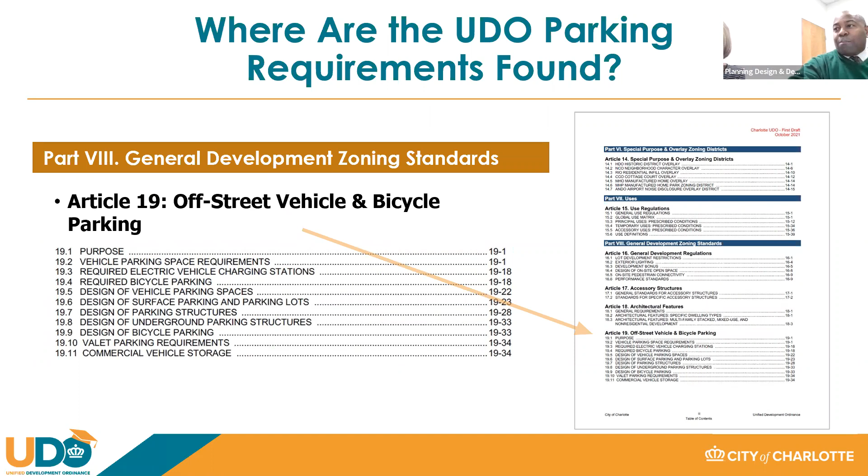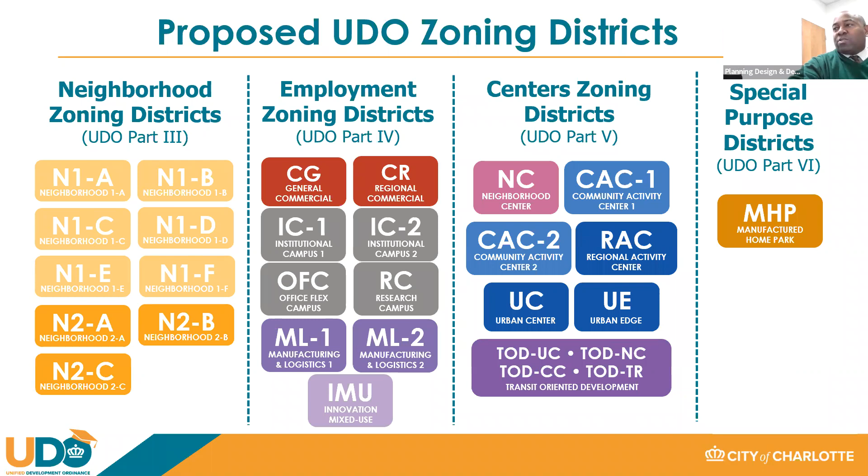When we had our proposed UDO districts, we had broken them up into, this is kind of a refresh, our neighborhood zoning districts, as you can see here. Then we had our employment zoning districts, our centers zoning districts, and then kind of our special purpose districts.

When we updated the UDO and our parking, we made changes. We went to a 3-tier approach to parking requirements. In tier 1, there are minimum off-street parking requirements and no maximum parking limits for the districts you see here: ML1, ML2, IC1, Office, MHP, N1, all the districts, and N2A.

In tier 2, we have both minimum and maximum off-street parking requirements for the IMU, IC2, RC, CG, CR, NC, CAC1, N2B, and N2C. In tier 3, there are no parking minimums except for a limited number of uses, including residential in certain locations. Maximum parking limits apply. That's in our TOD, UC, CAC2, RAC, and UE.

The tier 3 minimums for residential uses may be reduced or eliminated with a local city parking permit program or a parking studies strategy plan to reduce parking demand approved by the planning director.

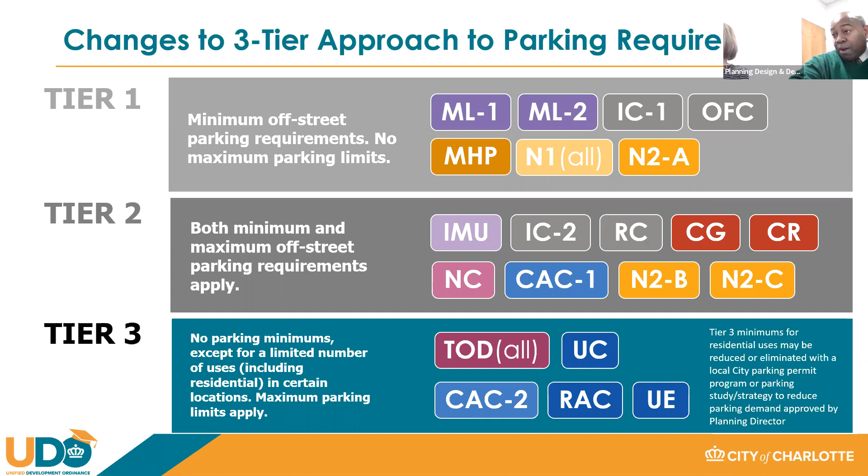The 3-tiered approach to parking requirements: again, in tier 1, there are minimum off-street parking requirements, no maximum parking. In ML1, ML2, and so on, for single family it's 2 spaces per unit. Manufactured homes, 1 space per unit. Other residential uses, 1.5 spaces per unit. For non-residential, we use the typical standard of 1 space per 500 square feet gross.

Some uses have different parking standards based on their unique characteristics. Car washes and correctional facilities are examples.

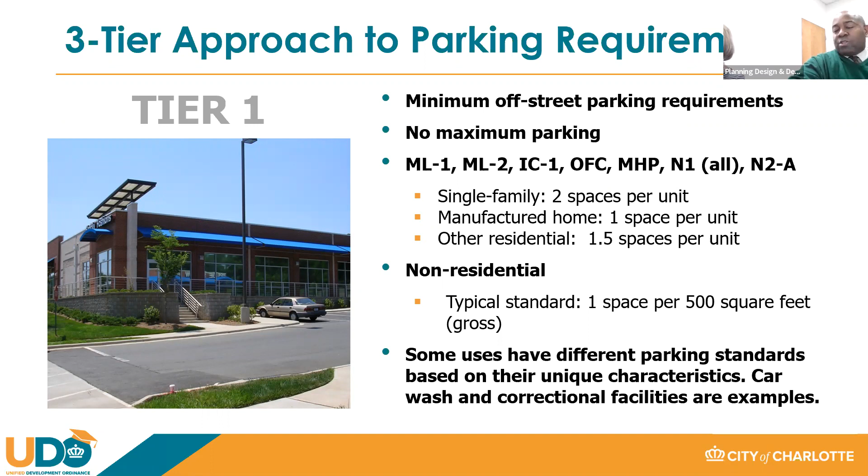In tier 2, it includes both minimum and maximum off-street parking requirements. The maximum does not apply to parking structures. You can see the districts listed here that it applies to.

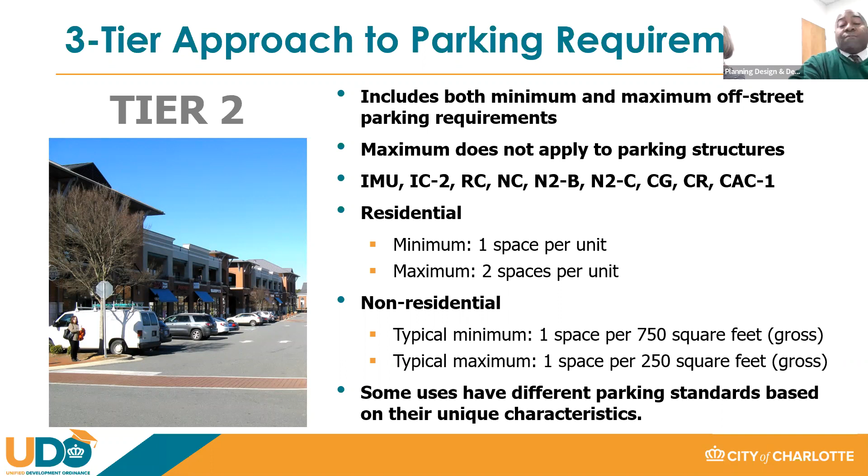For residential, we went to a minimum of 1 space per unit, with a maximum of 2 spaces per unit. For non-residential, the minimum was 1 space per 750 square feet gross, and the typical maximum was 1 space per 250 square feet gross. Again, some uses have different parking standards based on their unique characteristics.

In tier 3, the approach was based on our TOD districts. It focused on maximum off-street parking requirements, so again it's for our TOD, most of our urban districts, as you can see up there.

The minimum applies to multifamily residential, live performance venues, micro production of alcohol excluding brewing facilities, nightclubs, restaurants, and bars within 200 feet of an N1 zoning district. It's 1 space per 500 square feet gross, plus 50% of outdoor seating or activity area. Residential is 1 space per dwelling unit.

The maximum residential is typically 1 to 2 spaces per unit, depending upon dwelling type. Non-residential typically ranges from 1 space per 200 square feet to 1 space per 300 square feet.

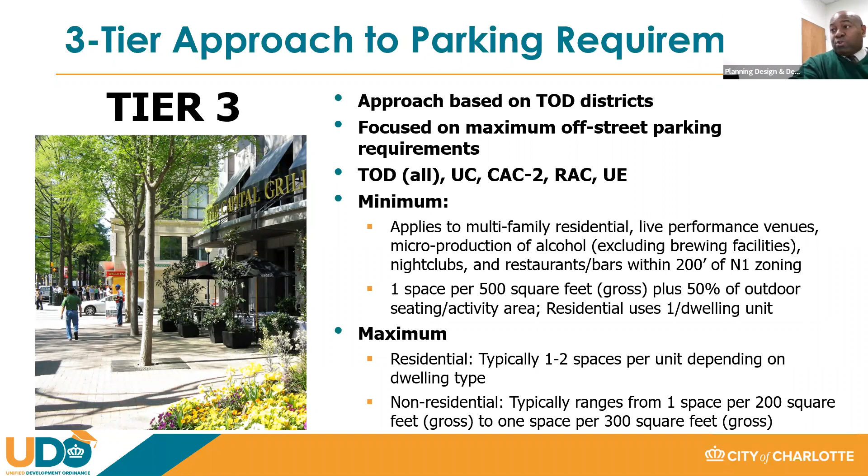Other vehicle parking standards: the calculation of vehicle parking spaces. Parking spaces are calculated based on the use. For mixed use, the number of spaces is the sum of the requirements for each use.

Putting it in general terms, if you have a strip center with a medical office, restaurant, and retail, we're basing the parking on the square footage of that area being leased.

Minimum off-street parking space requirements apply to construction of a new principal building, an existing principal building expanded resulting in a requirement of more than 10 additional spaces, or a change of use or expansion of an existing use resulting in a requirement of more than 10 additional spaces.

Think of it in general terms: if you had a requirement for 1 space but now the use requires 20, the difference is 19, and that's when the additional space requirements would be triggered.

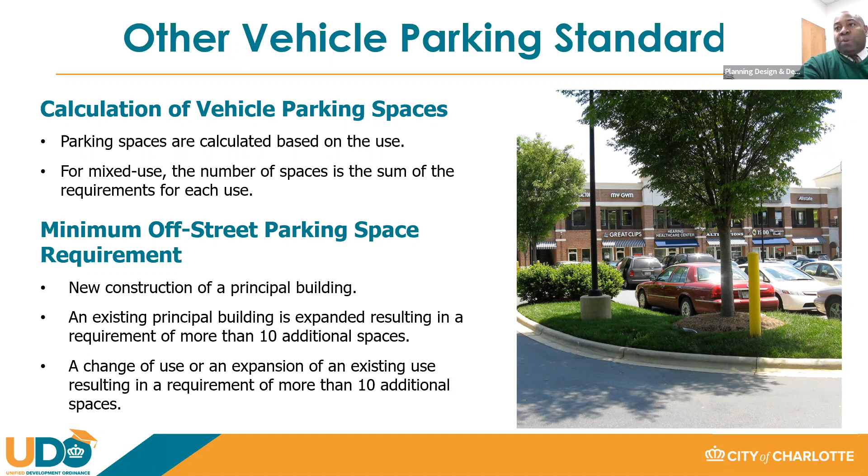Spaces exempt from parking maximums include required ADA spaces (Americans with Disabilities Act), EV installed spaces, and pickup/drop-off spaces such as those for ride-hailing services, delivery driver vehicles, and spaces for exchange of goods.

Also exempt are on-street parking spaces abutting the site, and visitor spaces for townhomes and multifamily developments, up to 10 spaces or 10% of the total number of units, whichever is greater.

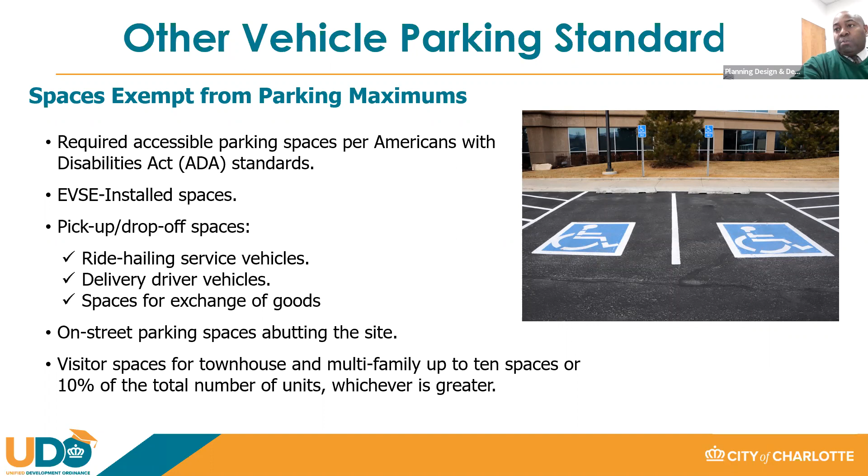We've also put in requirements for electric vehicle charging stations in the ordinance. There are two types of EV charging stations that may be required.

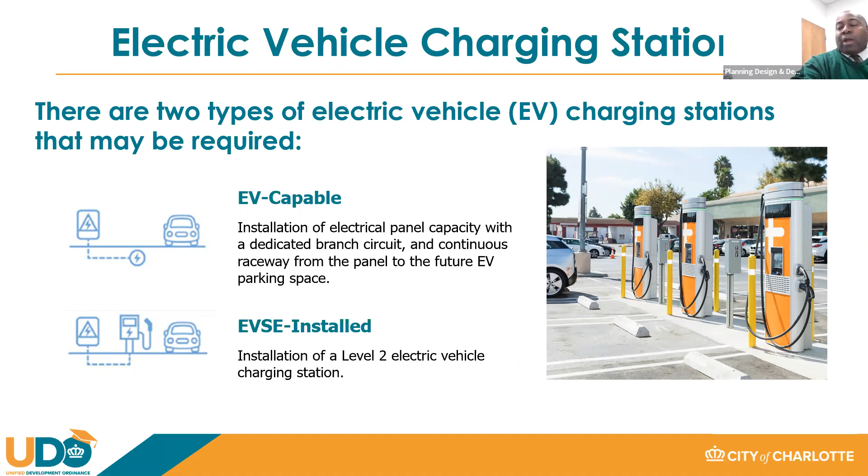EV capable is the installation of electrical panel capacity with a dedicated branch circuit and continuous raceway from the panel to the future EV parking spaces. EV SE installed is the actual charging station, where you can actually charge your electric vehicle.

For electric vehicle charging stations, you'll find the requirements in Table 19-2. It shows, as part of the total number of off-street spaces, how it's broken down into EV capable spaces and EV installed spaces, along with the required percentage.

For example, for 10 to 25 spaces, 20% would be required to be EV. You would then round up depending on that calculation.

Uses that typically require EV charging station requirements are multifamily stacked dwellings, the residential component of mixed use developments, hotels, parking lots, and parking structures as a principal use.

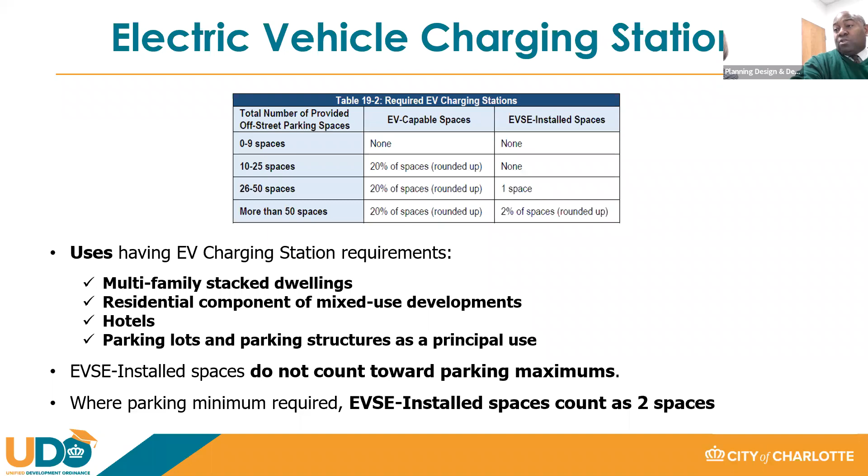EV SE installed spaces do not count towards parking maximums. Where parking minimums are required, EV installed spaces count as 2 spaces when provided.

Also part of the parking standards is location and access. The location of and access to surface parking areas differs by zoning district, and these standards are found in Article 19.6 and Table 19-4.

When you look at this chart, it tells you where you can have it, and where the check mark is, that's where it's allowed. If the box is grayed out, that means you cannot have that for that district.

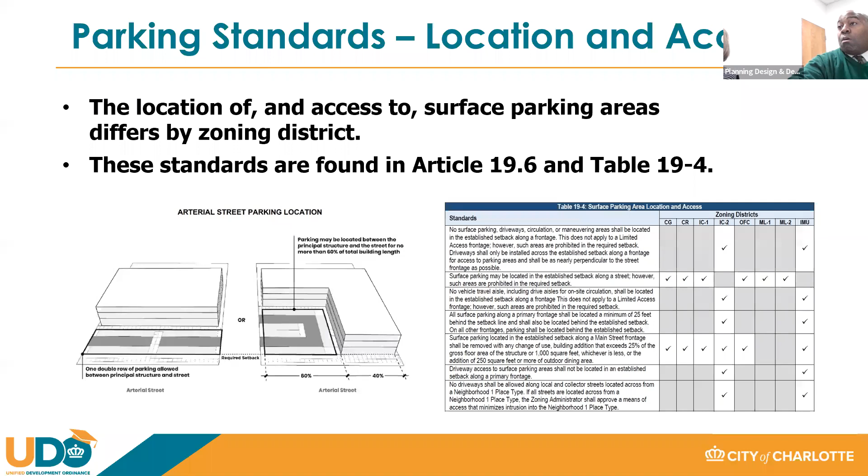There are also some requirements for the design of parking structures. Parking structures must meet standards for screening of vehicles, the vehicle clear sight zone, treatment resembling the architecture of the occupied building along the street and other frontages, and architectural elements to create pedestrian-scale interest, with options including awnings, overhangs, and decorative screens.

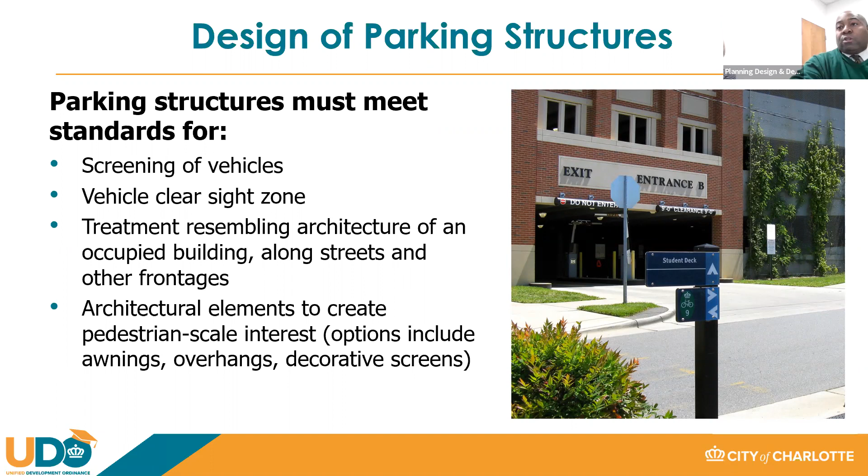In the UDO, in this article on the design of parking structures, there are several options. Option A is wrapped with ground floor activation. Option B has ground floor activation and a step back. Option C is ground floor activation with screening, and option D is setback with a landscape area.

Table 19-5 indicates which design options are available by frontage type and zoning district. For example, on Main Street in N2C, if you're doing a parking structure, you have options A and B. In CG you would have A, B, and C, and in CR, A, B, C, and so on. When you look at some of the other districts, like secondary streets, you get more options for how you design the parking structure along that frontage.

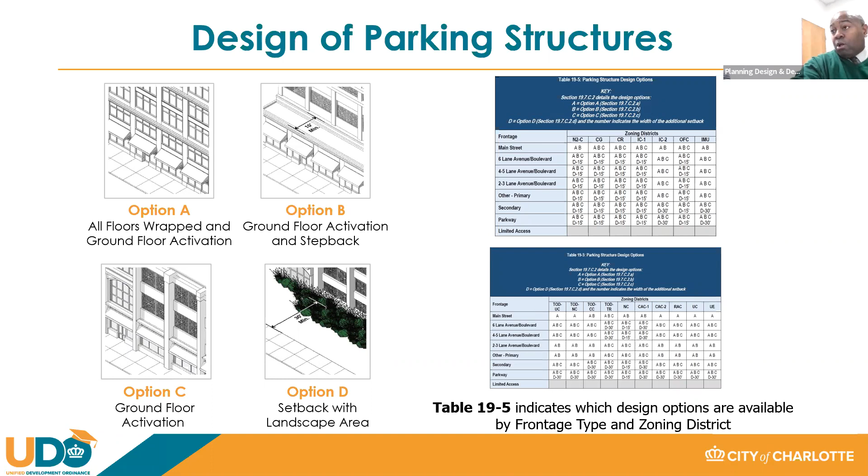Required bicycle parking is triggered by new construction of a principal building, when an existing principal building is expanded resulting in a requirement of more than 5 additional bike parking spaces, or a change of use or expansion of an existing use resulting in a requirement of more than 5 additional bicycle spaces. There are short-term and long-term spaces. The number of long-term spaces, if any, is a percentage of the required total bicycle spaces. All other bicycle spaces shall be designed as short-term spaces.

The difference between short-term and long-term: short-term spaces are the standard U-racks you see out there—back in the old days it was a wave rack—and those are basically uncovered, outside the door. Long-term spaces are typically covered, and there is a requirement to protect the rider's bike from the elements and weather while parked.

For the minimum and maximum where bicycle parking is required: a minimum of 2 short-term bicycle spaces shall be provided, no more than 30 short-term spaces are required, and for non-residential uses, no more than 50 long-term bicycle parking spaces are required.

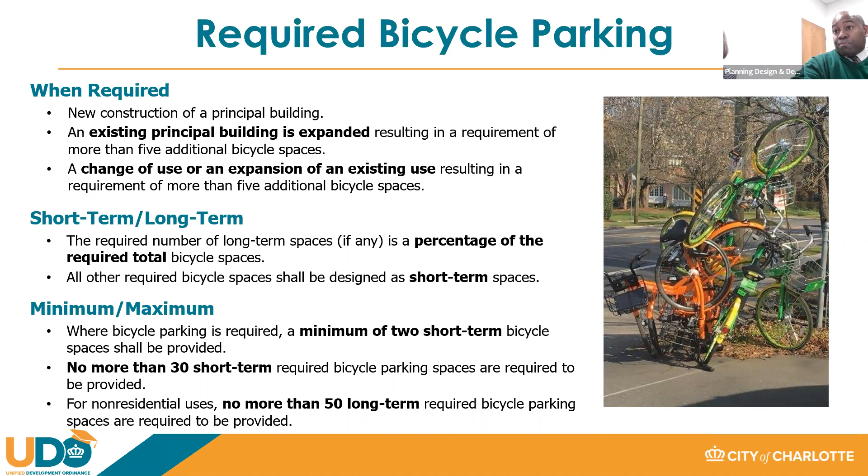Bike lockers and racks shall be located on a hard surface and be securely anchored. All bicycle racks and bicycle parking spaces shall be designed to meet the standards and design specifications of the Charlotte Land Development Standards Manual. Alternative designs may be deemed acceptable through review and approval by the Charlotte Department of Transportation and the commercial zoning team.

Short-term bicycle parking may be located in the right-of-way, subject to approval by the Charlotte Department of Transportation or the North Carolina Department of Transportation, depending on the road your site fronts on. All long-term spaces shall be fully covered from inclement weather.

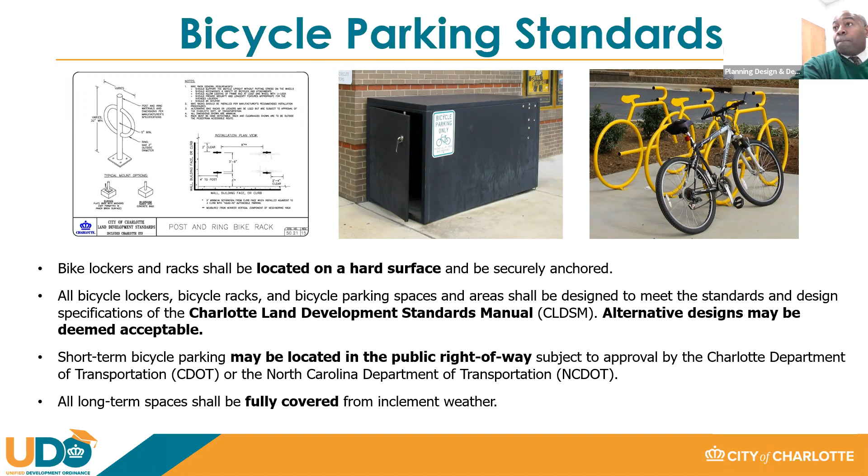For required bicycle parking, some residential uses such as single-family, duplex, triplex, quads, and townhomes do not have a minimum bicycle parking requirement. Certain other uses may not have bicycle parking requirements either—these are typically auto-oriented uses such as a car wash or gas station, or industrial uses such as a salvage yard or recycling center. Table 19-3 contains the bicycle parking requirements according to use.

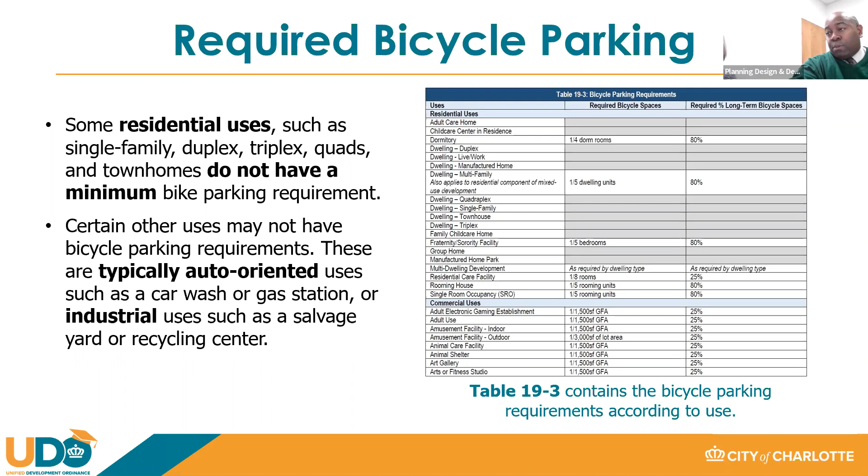Looking at the example for multifamily dwellings, you would have 1 bicycle space for every 5 dwelling units, with 80% required to be long-term spaces. For commercial use, it's 1 space for every 1,500 square feet of gross floor area, with 25% of that number required to be long-term spaces.

Now, moving into the next section, once you have your parking requirement established, we have the UDO landscaping and screening requirements for your parking, and also some of your uses required in the current ordinance, which we call buffers. Today we're calling them landscape yards. That's in Article 21, which handles everything from 21.1 all the way to 21.12, falling under the Chief Urban Forester's administration and his team for review.

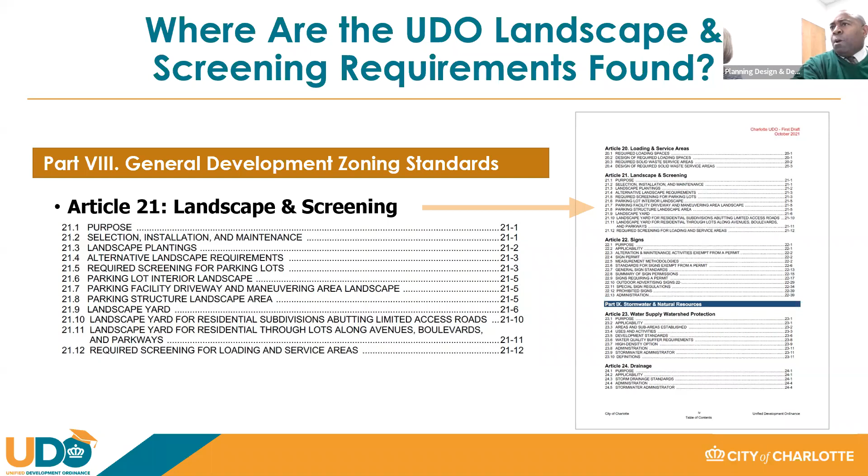The purpose of landscape and screening standards is to preserve and enhance the appearance and character of the city, increase the compatibility of adjacent uses, minimize the adverse impact of objectionable activities or impacts on neighboring uses, and create transitional areas between uses or districts of different intensities.

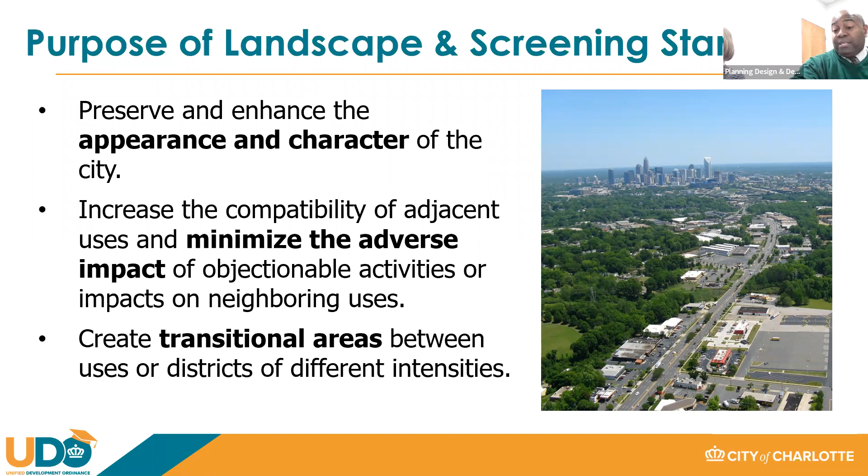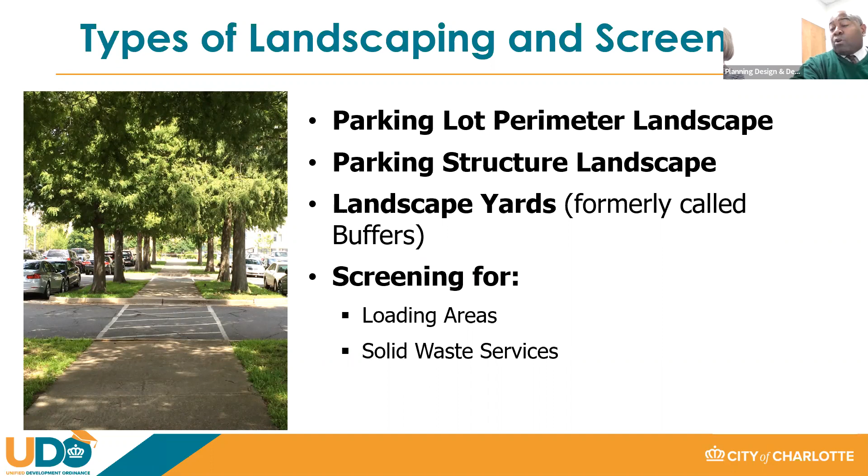The types of landscape screening are: parking lot perimeter landscape, parking structural landscaping, landscaping yards (formerly called buffers), screening for loading areas, and solid waste services.

For selection, installation, and maintenance: all landscaping shall be installed according to sound horticultural practice, in a manner designed to encourage quick establishment and healthy growth, and consistent with the Charlotte Land Development Standards Manual.

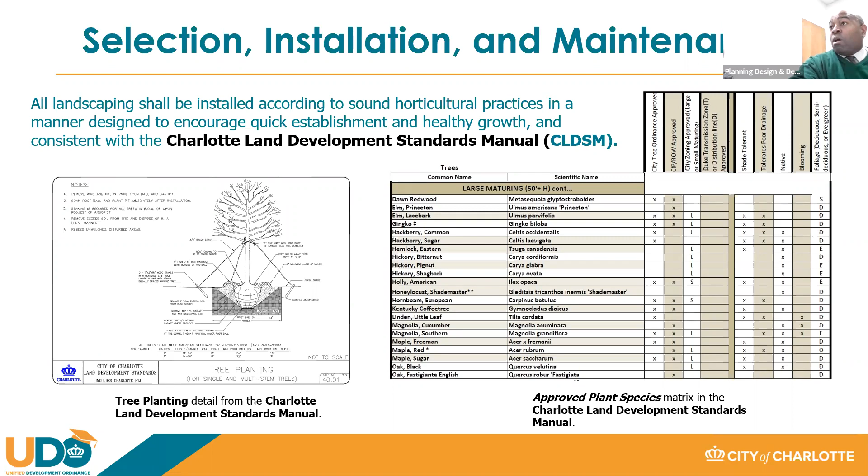There is a new provision in the UDO called species diversity. Diversity among required plant material is required for visual interest, and also to reduce the risk of losing a large population of plants due to disease.

Maintenance: all landscaping shall be free from disease, pests, weeds, and litter. All landscaping elements should be maintained in good repair or replaced periodically as needed to ensure their continued function, structural soundness, and aesthetically pleasing condition.

Any landscape element that dies or is seriously damaged shall be removed and replaced within 30 days of the beginning of the subsequent growing season. Any ornamental grasses or shrubs planted next to sidewalks shall be planted and maintained so that they do not encroach into the sidewalks at maturity.

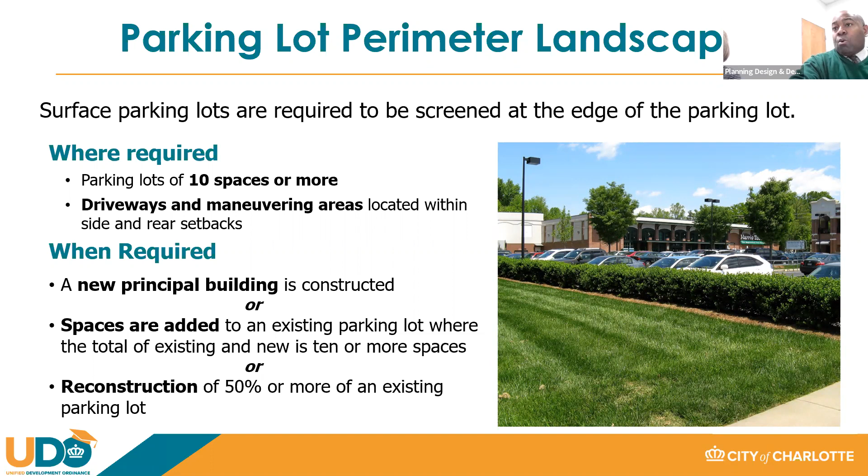Parking lot perimeter landscaping: surface parking lots are required to be screened at the edge of the parking lot where required - for parking lots of 10 spaces or more, driveways and maneuvering areas located within the side and rear setbacks. This applies when a new principal building is constructed or spaces are added to an existing parking lot where the total existing and new is 10 or more spaces, or for reconstruction of 50% or more of an existing parking lot.

Exceptions: when parking areas are shared between properties, perimeter landscaping is not required along a shared lot line. When perimeter landscaping and a landscape yard are both required, the landscape yard requirements control. Vehicle dealerships are not required to install landscaping along areas of the parking lot used to display vehicles for sale. It's also not required along the edge of the site abutting another property if the zoning administrator determines it would serve no meaningful purpose.

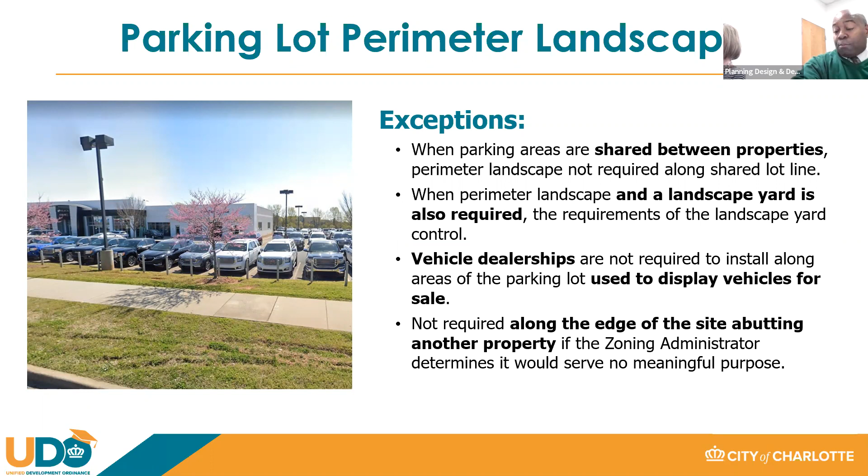General standards. Landscaping areas shall be at least 5 feet in width, with an additional 2 feet between the landscape area and any wheel stops or curbs. Shrubs shall be evergreen and a minimum of 2 feet in height when planted, provided an average height of 3 to 4 feet and a minimum spread of 2 feet is expected as normal growth within 4 years.

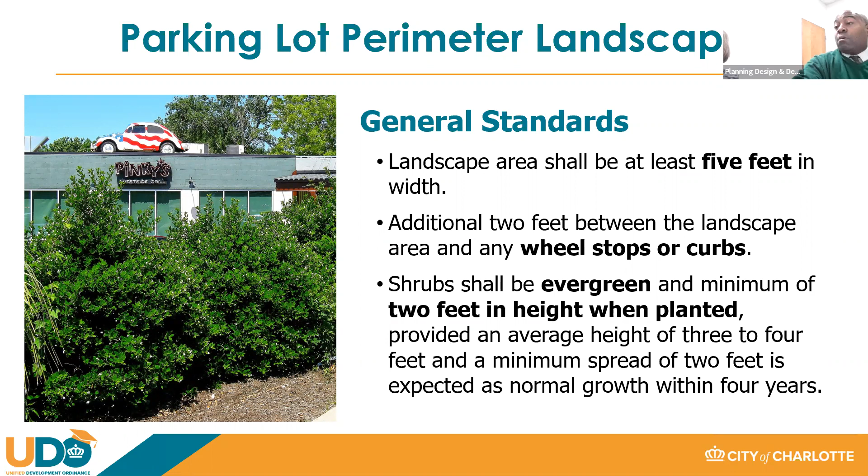There are several design options. Option one is 1 shrub for every 5 feet. 60% of the landscape area must be planted with a mix of ground cover, perennials, ornamental grasses, and other native planting types that provide a minimum of 3 feet in height at maturity. The result of all plantings shall be a semi-opaque screen that obscures a minimum of 75% of the view from the ground to a minimum of 3 feet and a maximum height of 4 feet.

Option 2, as an alternate to option 1: a pedestrian wall of 4 feet in height may be installed. Shrubs, ground cover, perennials, ornamental grasses, and other native planting types shall be planted in the area in front of the wall. Up to 30% of the total length of the wall may be designed as a seating wall. Where seating areas are included, the minimum wall height does not apply and plantings are not required in front of the wall.

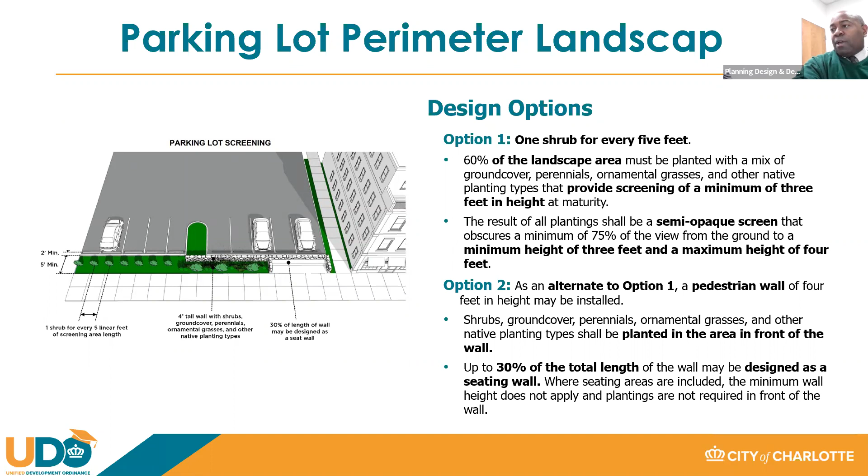Parking structure landscape area. When a landscape area is required for a parking structure, it shall be planted as follows: 1 shrub for every 5 feet of perimeter area length, minimum 1 large or medium maturing tree for every 30 feet of the landscape area. 3 small maturing trees may be substituted for 1 large or medium maturing tree. Trees must be spaced linearly on center or grouped to complement an overall design concept. The remaining area outside of the shrub and tree masses shall be planted in ground cover, turf, perennials, ornamental grasses, and other native type plantings.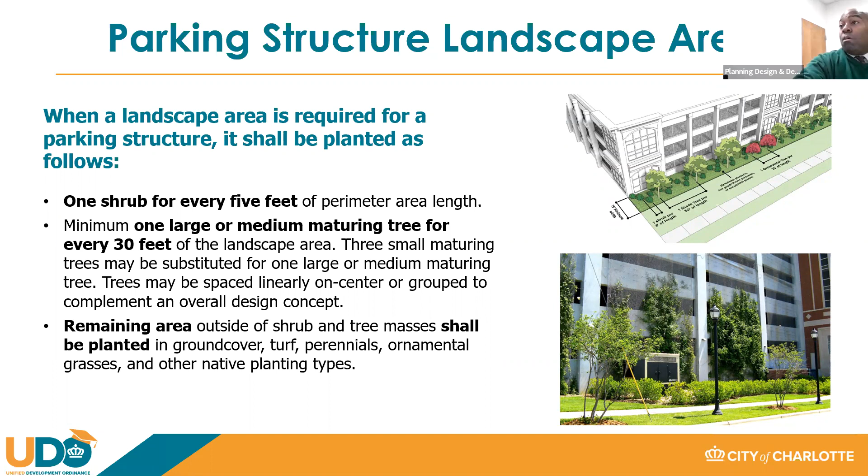Landscape yard, also known as, was previously called, buffers. Certain uses or districts, because of their character or intensity, may create adverse impacts when developed adjacent to other less intensive uses or districts. A landscaping yard provides a transition between these uses and/or districts that minimizes adverse impacts. A landscape yard is required with new construction of a principal building, an addition to an existing principal building, an additional principal or accessory use conducted primarily outdoors established on the site, or a change of use category within the use matrix found in Article 15.

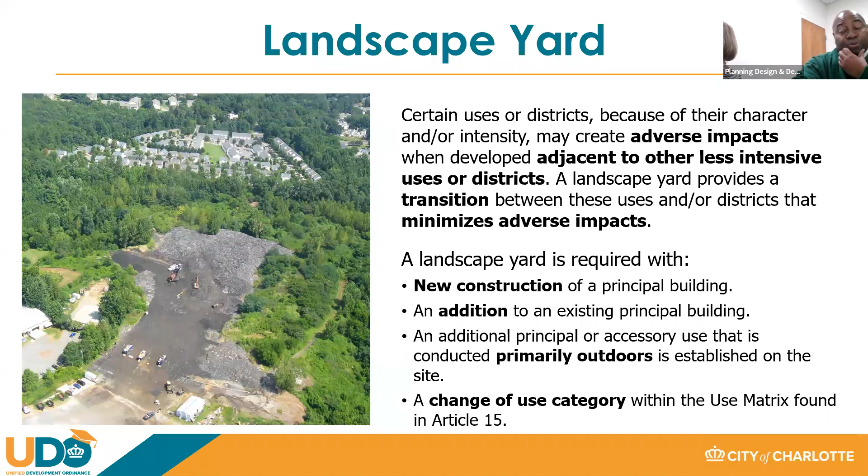Table 21.2, landscaping yard class, describes the width and design of each class of landscape yard. Column A shows the width of the landscape yard based on development size: up to 3 acres is 40 feet, 3+ acres is 65 feet, 7 to 10 acres is 85 feet, and more than 10 acres is 100 feet. For table B, it would be 25 feet, and for C, it's 10 feet.

Going down, it tells you about the shrubs. In zone 1, you have to have evergreen shrubs for every 2 linear feet. In zone 2, you have 1 evergreen shrub for every 300 square feet. Then it continues similarly for class B, and so on as you look through this table.

Going down further, there's a fence and wall section. If you're going to use that, in zone 1 it's optional. In zone 2, a fence or wall is not permitted. The width of zone 2 may be reduced by 25% if a solid fence or wall is provided in zone 1 — again, it's optional. For class C, it is a solid fence/wall requirement. We've also put a requirement for the fence or wall: for A, it's a 6 foot minimum and 8 foot max. For B, it's also a 6 foot minimum and 8 foot max. For C, it's a 6 foot minimum and a 10 foot max.

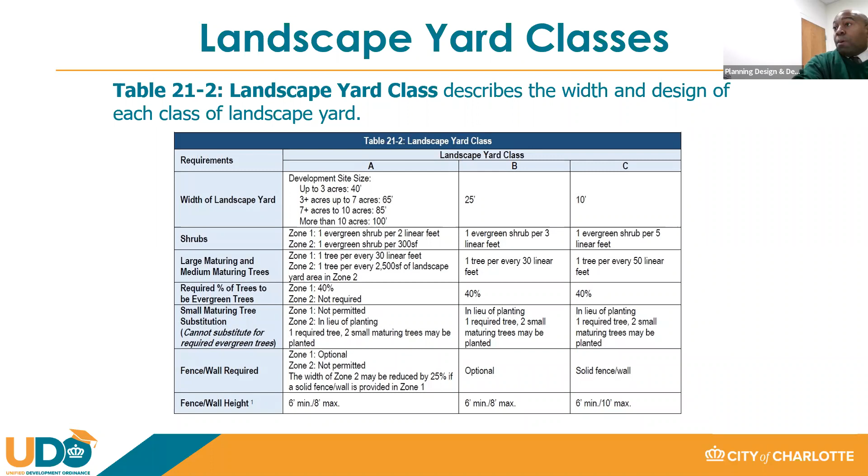The Class A landscape yard is divided into Zone 1 and Zone 2 as follows. Zone 1 comprises the first 25 feet of the landscape yard, measured perpendicularly from the rear yard or interior side lot line. Zone 2 comprises the remainder of the required landscape yard outside of Zone 1. Within zone 2, plantings may be grouped to complement an overall design concept. All required trees are to be large maturing or medium maturing trees; substitution for small maturing trees may be permitted by the table.

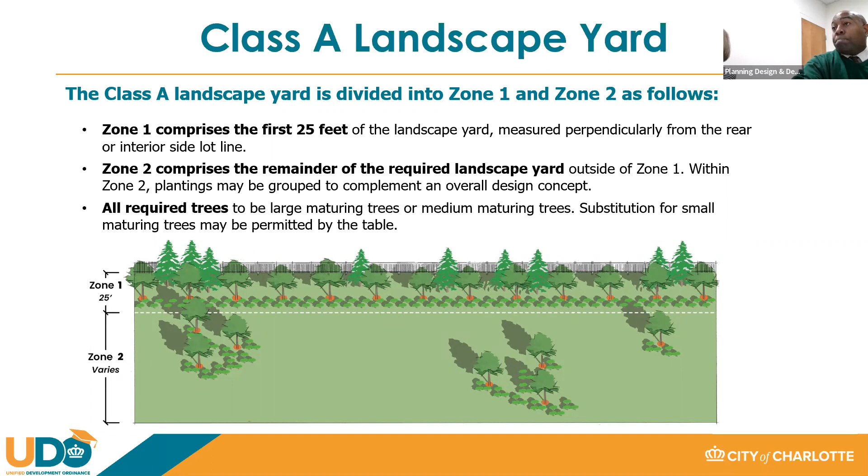Required landscape yards by district. The requirement for a landscape yard and the class of the landscape yard, A, B, or C, depends on the zoning district of the development site, the type of development, and what it abuts.

For example, if we go to N2C, it's saying required to install landscape yard when you're adjacent to non-residential or mixed-use development, townhome, multifamily development use. And it says landscape yard required when you're abutting a residential use. It is saying you have to have a B. If you're abutting a single family duplex, triplex, or quadruplex dwelling, you have to have a class B.

Now, some of the ones where you get more into your class A, you're getting into your more heavy uses. So if you look at ML1, ML2, when you're abutting another district, except CR, ML1, ML2, I1 CD or I2 CD, it's typically a class A. Abutting a CR zoning district, you have to have a B. And when located across the street from a neighborhood 1 or neighborhood 2 place type, you have to have a class B. That's when you look at your zoning district, look across, and that tells you what it is when you're using these tables.

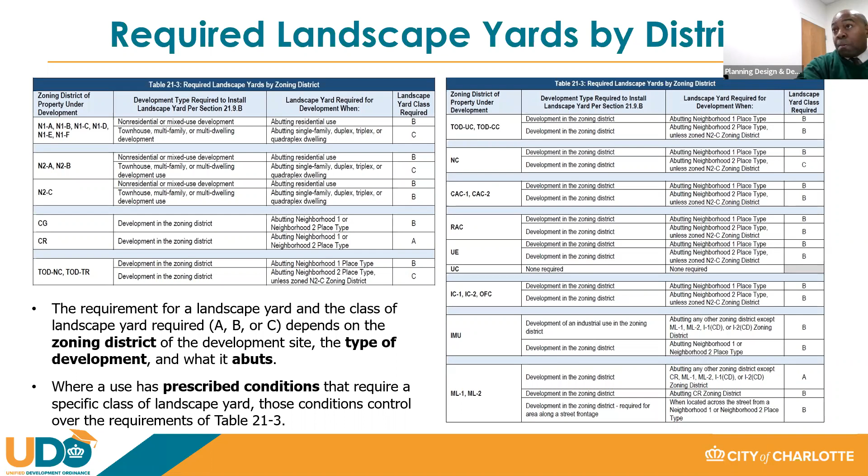Landscape yard location. Required landscape yards shall be located within the side and rear setbacks. In certain circumstances, landscape yards may be specifically required for other setbacks outside of the side or rear setback, which was called out for some of your industrial when you're across from residential.

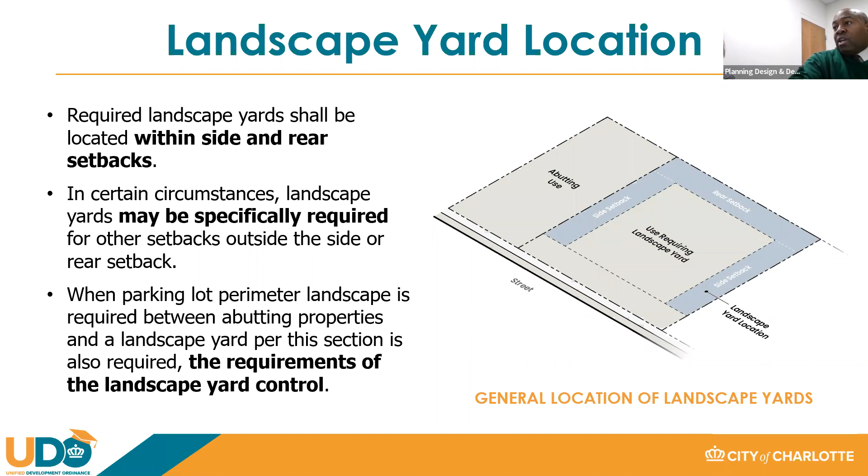When parking lot perimeter landscaping is required between abutting properties, and a landscape yard per this section is also required, the requirements of the landscape yard control. The detail on the right shows the general location of a landscape yard, showing your frontage and where your side and rear setbacks are and where that landscape area is. And then it shows the abutting use.

Required screening. Loading areas. All districts except ML1 and ML2: exterior loading areas shall be screened from all streets, frontages, and along required side and rear setbacks with a minimum 75% opaque wall or fence, a minimum of 6 feet to a maximum of 8 feet in height. ML1 and ML2 districts, exterior loading areas to the side and rear of buildings are not required to be screened.

Any loading areas visible from a public or network required street must install parking lot screening. Internal loading areas must be screened with loading doors, and the loading doors must remain closed when not in use.

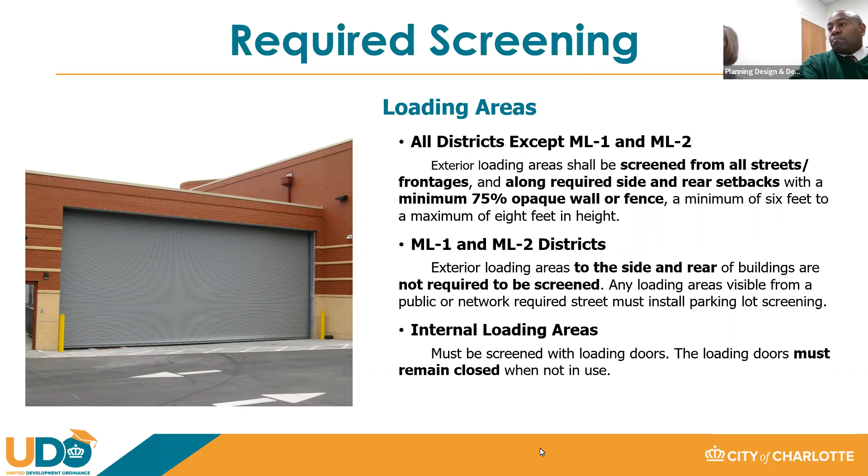Required screening. Large waste containers, recycling stations, and solid waste areas. Exterior dumpsters, recycling containers, and solid waste handling areas must be fully enclosed on 3 sides by a minimum 75% opaque fence, wall, or wall extension of the principal building. A wall extension must be constructed as an integral part of the building's architectural design.

Such fence or wall shall be a minimum of 1 foot above the height of the container to a maximum of 2 feet above the container. The enclosure must be gated. Such gate must be solid and a minimum of 6 feet and a maximum of 8 feet in height. Dumpsters and recycling containers must remain in the enclosure with the gate closed and/or locked.

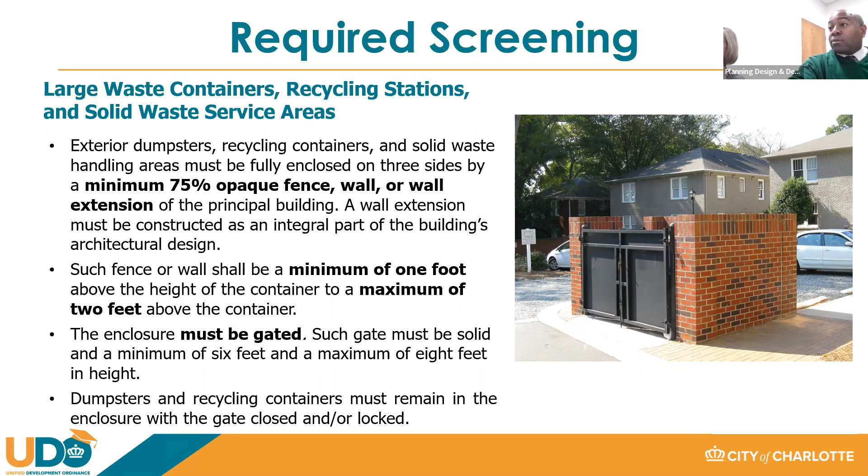Alternative landscape requirements. The zoning administrator may alter the landscape or screening requirements if one or more of the following conditions would make strict adherence to the requirements serve no meaningful purpose, or would make it physically impossible to install and maintain the required buffer or screen.

Unusual topography or elevation, or the soil or subsurface condition on the site. The modified landscape yard or screening must comply with the spirit and intent of the landscape requirements, and the existing site features and any alternative buffer materials will screen the proposed use as effectively as the required buffer or screening.

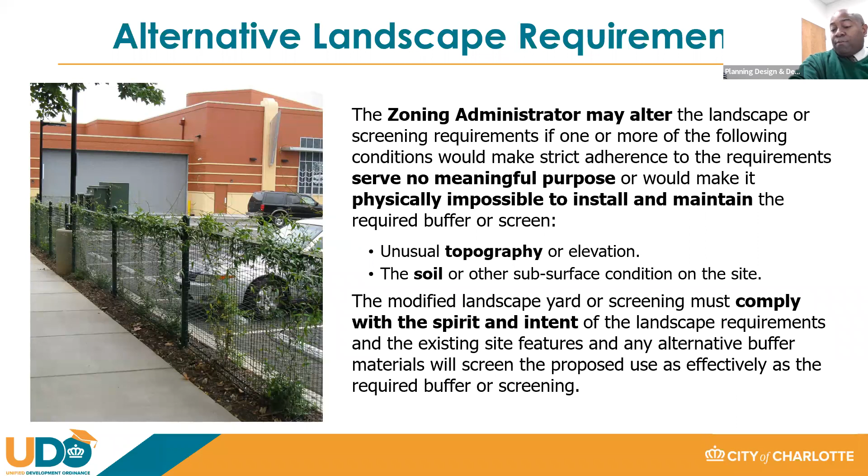Open space. Open space requirements are found in Article 16, specifically 16.4. It basically gives you the requirements for the design of on-site open space. In addition, open space requirements are included for each individual zoning district in their respective articles.

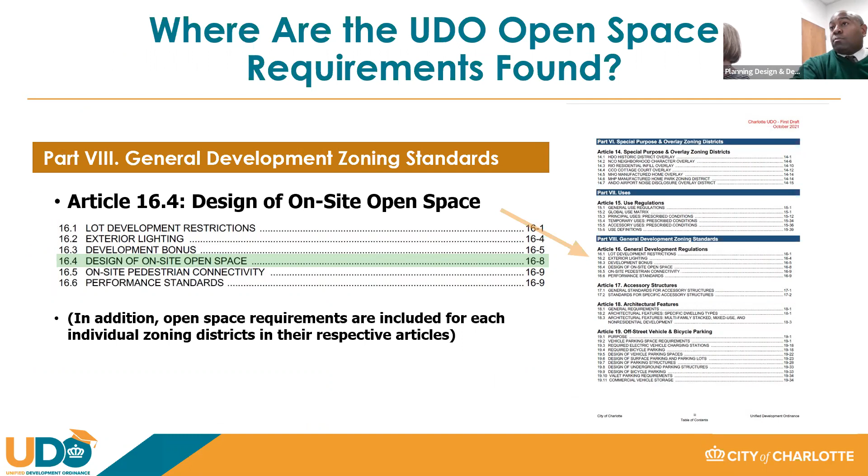Open space requirements again. When required within the zoning district, open space shall meet the design requirements of table 16-1, design of open space organized by type: public, common, or private. Driveway, sidewalk, parking areas, required bicycle parking, above ground utility areas, mailboxes, landscape yards, required stream buffers, and tree save areas do not count towards on-site open space requirements.

Uses exempt from required on-site open spaces. Uses within the categories of open space, recreation and agricultural uses, infrastructure uses, or transportation uses in the use matrix in Article 15 are not required to provide on-site open space.

Open space requirements for neighborhood zoning districts. New development, change of use, and expansions of buildings by 5,000 square feet or 20% of the building area, whichever is less, is required to provide open space as specified in this section. Such open space may be private open space, common open space, public open space, or any combination thereof.

Looking at the table, if you follow the use down, such as multifamily stacked, and go across in N1F, it's required to be 10% of the lot area. In N2A, 10% of the lot area. And N2B, same thing all the way across.

Multifamily attached would have to have 250 square feet per unit. As you went up to N2B, it drops down to 150 square feet a unit, and N2C the same way. For non-residential, in any of those districts, it's 10% of the lot area for sites greater than half an acre. Same with mixed-use development, 10% of the lot area, again for sites greater than half an acre.

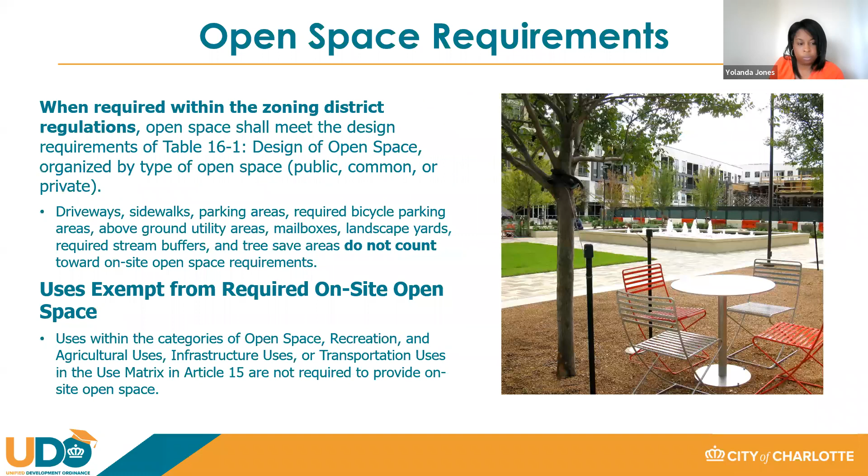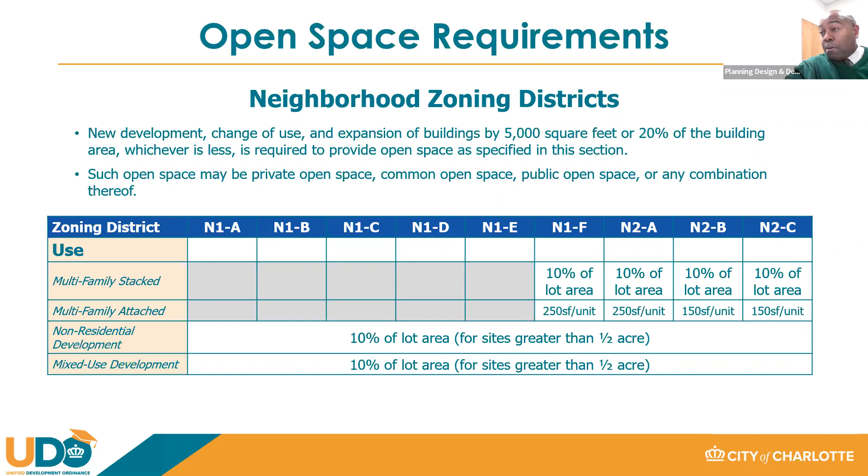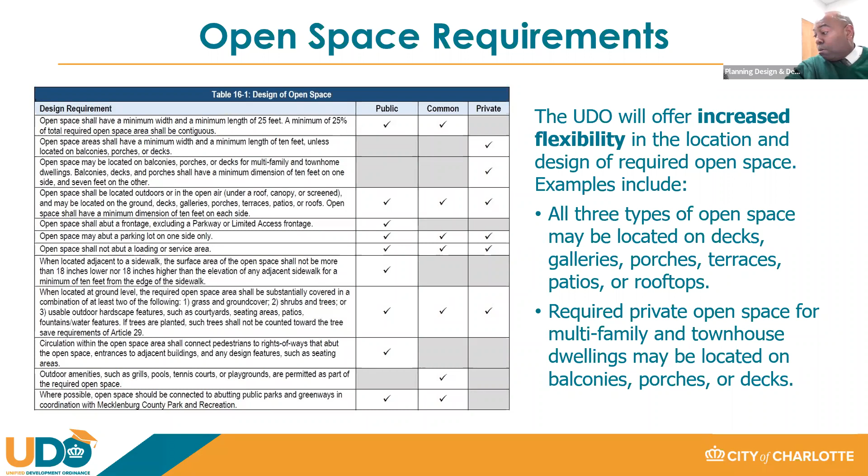Yes, he said, thanks, that was it. So where you were, this one here? I'm sorry, I don't have a view of our cameras. Did you want the table 16-1? I think maybe just leave that on the screen and we'll watch to see if that changes. That is what you're asking for.

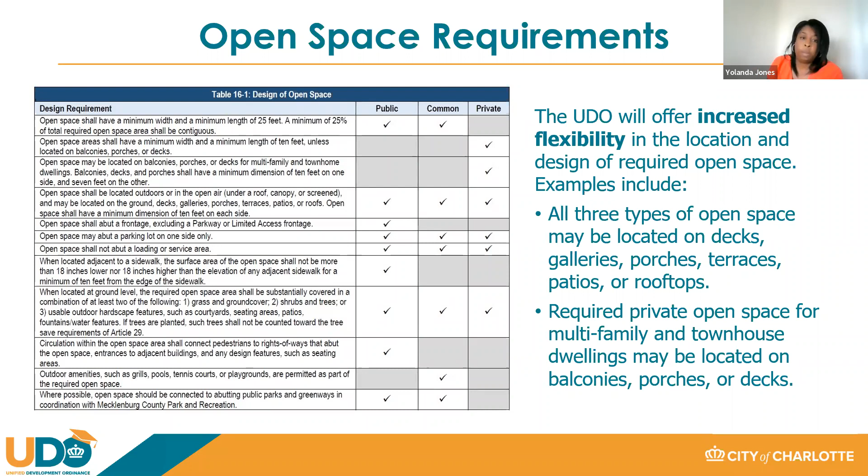Carla's asking for the previous slide. So maybe one back. Where is that table with this table? She's asking, I guess, where is this within the UDO? And I don't know if that is in reference to, Alan, what you were speaking about, as it's not essentially in a table format.

And if I can jump back in, I've got something I can add to that, where we measure that 400-foot distance for parking. May be able to shed some light on that if we get a chance.

Yeah, go ahead, Alan. It's in Article 2 in the definitions of separation, and I'll read it: when principal uses are required to be measured a certain distance from another use or district, the distance is measured in a straight line from the nearest point of the lot line on which such principal use is proposed to be located to the nearest point on the lot line where the other use or district is located, unless otherwise specifically required to be measured differently by this ordinance.

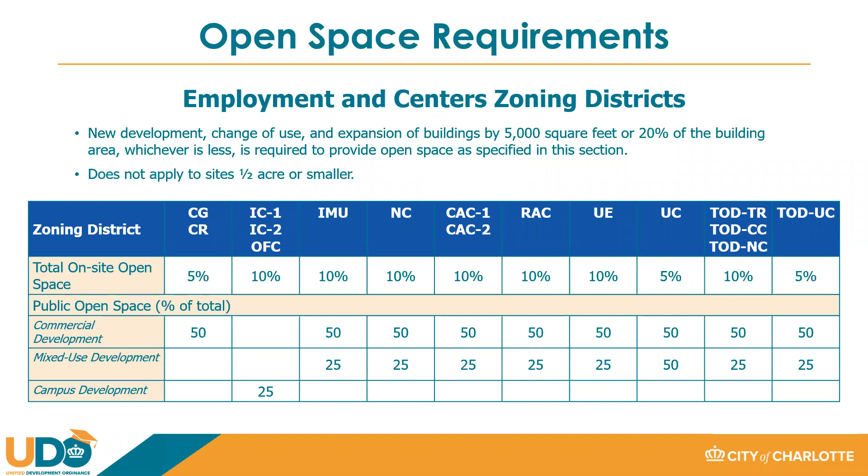So it's basically measuring from the lot line of whatever development is triggering the requirement to the lot line, I would guess, of the nearest property in the neighborhood 1 zoning district, in a straight line. I know that's probably hard, but it's in Article 2 under general definitions, the definition of separation.

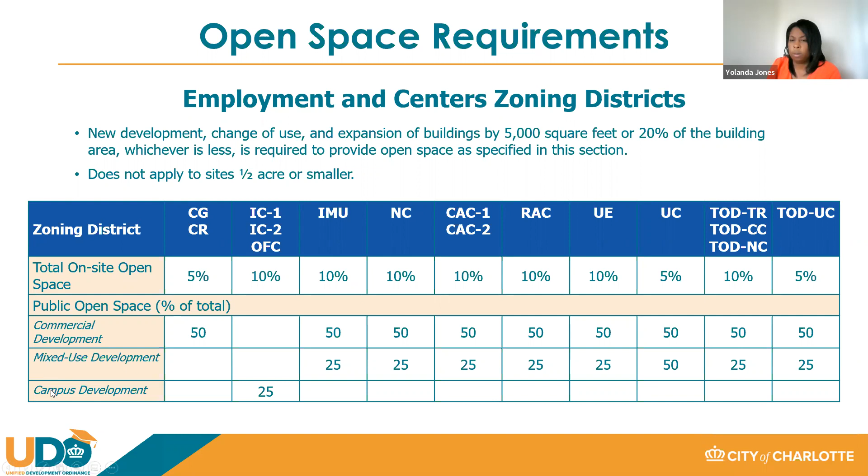Thank you, Alan, for that. I see that Laura has, and I don't know if this is a question, Laura, but plant material for screening. I'm not sure if you're asking something in reference to that or if it's just reference to a previous question. Please let us know if there's more to that.

Then Elise asks, from the design option 2 in the parking lot perimeter landscape slide, when 30% of the length of the pedestrian wall may be designed as a seat wall, what does the UDO design criteria say determines a seat wall? If yes, what are they? I'm sorry, I probably totally butchered that question, but not sure if Alan or Solomon can answer.

Okay, well let me get... And when I'm being told, I'm sorry, Laura's response was for clarity from a previous question. I mean, we will have to follow up with that one, because I believe right now it just gives you the drawing of what the seat wall looks like.

Solomon, let me jump in on that. It's in section 20.5, letter B, design of screening areas, under number 3B. I'll read it: as an alternate to the shrub plantings in item A above, a low pedestrian wall of 4 feet in height, constructed of masonry, concrete, or similar, may be installed. Then underneath that, in Roman letter II, up to 30% of the total length may be designed as a seating wall. Where seating areas are included, the minimum wall height does not apply. So that's as much as the UDO says about the design of that seating wall, just basic dimensional requirements plus the illustration below.